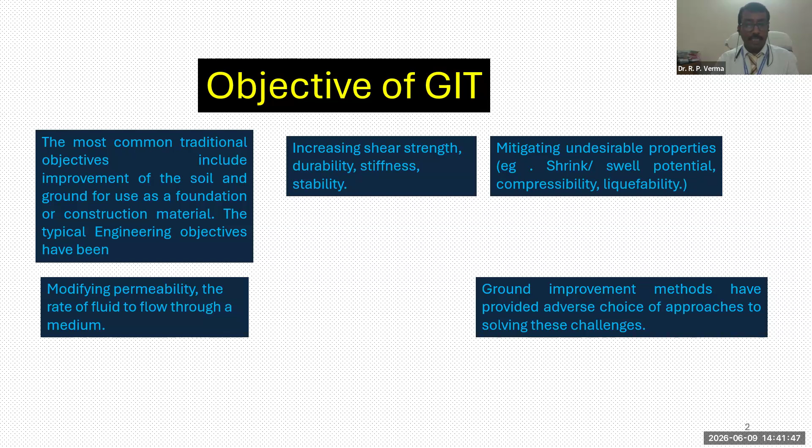This slide explains the major objective of ground improvement techniques. The main purpose of ground improvement technique is to improve weak soil so that it can safely support foundation and construction activity. The objectives include increasing shear strength, stiffness, durability, and stability of soil. It also helps in reducing undesirable properties such as shrinkage, swelling, compressibility, and liquefaction. Another important objective is controlling permeability and fluid flow through the soil. Therefore, ground improvement methods provide effective engineering solutions for problematic soil conditions.

Ground improvement technique is broadly classified into four major categories. These include mechanical modification, hydraulic modification, physical and chemical modification, and modification by inclusion of confinement. Each group offers specific chemical or mechanical interventions to solve distinct subsoil challenges.

When we integrate waste material into this technique, our objective expands into environmental sustainability. We provide alternative disposal solutions for plastic waste, achieve economical soil stabilization by determining optimum plastic fiber content, and minimize the industrial carbon footprint. Mechanically, this includes successfully increasing the shear and tensile strength of the soil matrix while decreasing its overall compressibility.

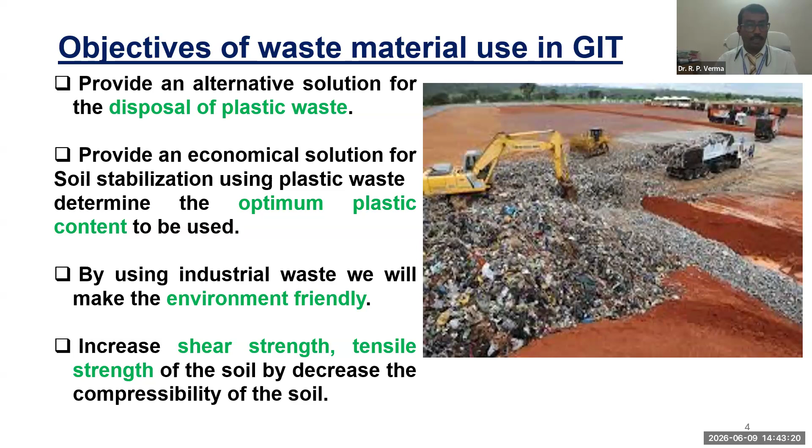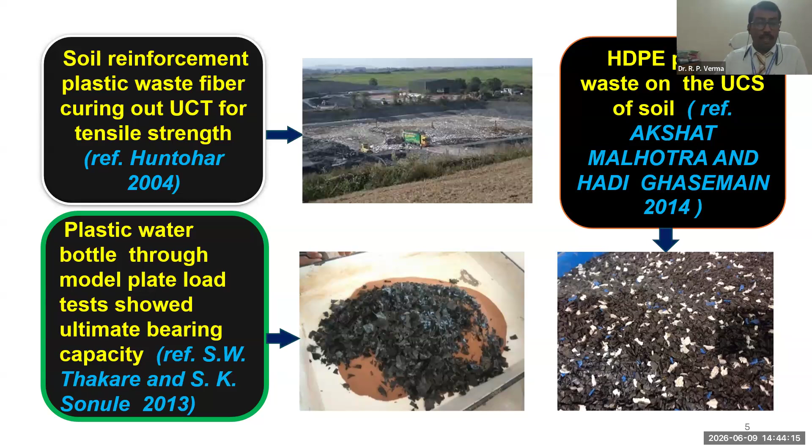Several landmark studies support this approach. Huntohar in 2004 demonstrated enhanced tensile strength by curing plastic waste fiber in an unconfined compression test. Thakare and Sonule in 2013 used plastic waste bottle pieces in a model plate load test. A 2014 study detailed the definitive positive impact of HDPE plastic waste on the unconfined compression strength of soil.

To evaluate this soil mixture, we rely on established testing methodology, starting with the triaxial test. This test measures shear strength under controlled saturation, confining stress, and vertical axis stress. Depending on the drainage conditions of our project layout, we perform unconsolidated undrained, consolidated undrained, or consolidated drained tests.

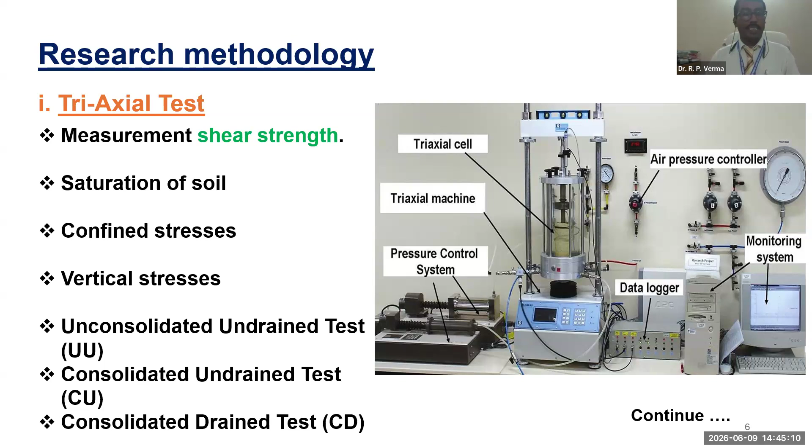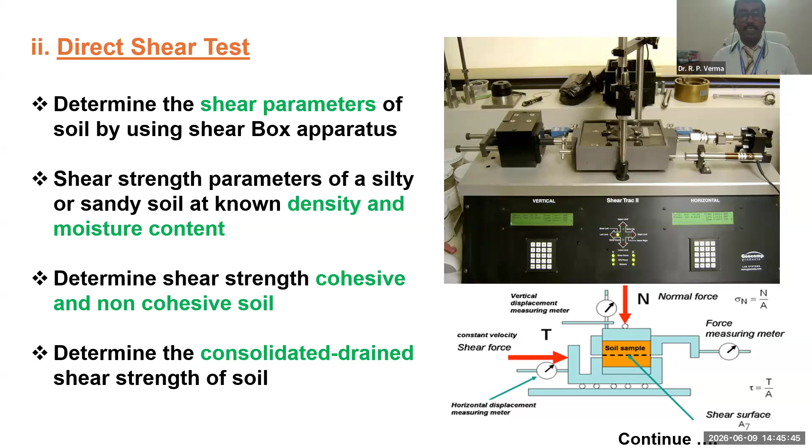Next, the direct shear test utilizes a standard shear box apparatus, allowing us to determine the primary shear parameters. It helps evaluate the cohesion and internal friction angle of both cohesive and non-cohesive soil at predefined densities and moisture content, specifically under consolidated drained conditions.

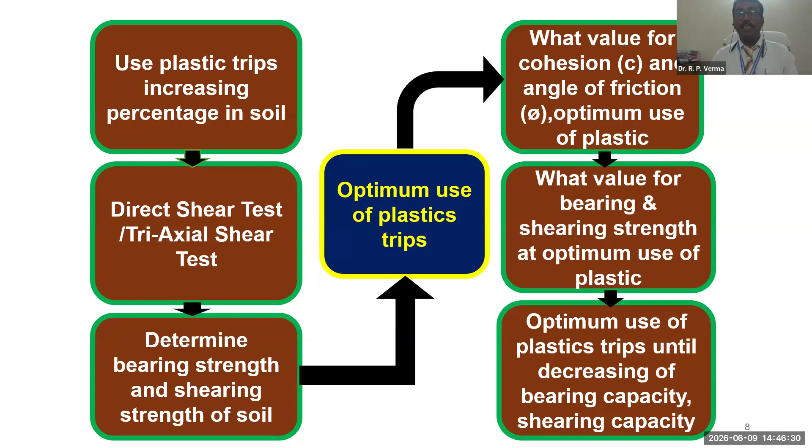This flowchart represents our optimization methodology. We systematically add increasing percentages of plastic strip to the soil, execute direct shear or triaxial tests, and monitor the resulting bearing and shearing strength. We map how cohesion and the friction angle change, continuing this incremental addition until the bearing capacity reaches a peak and begins to decrease.

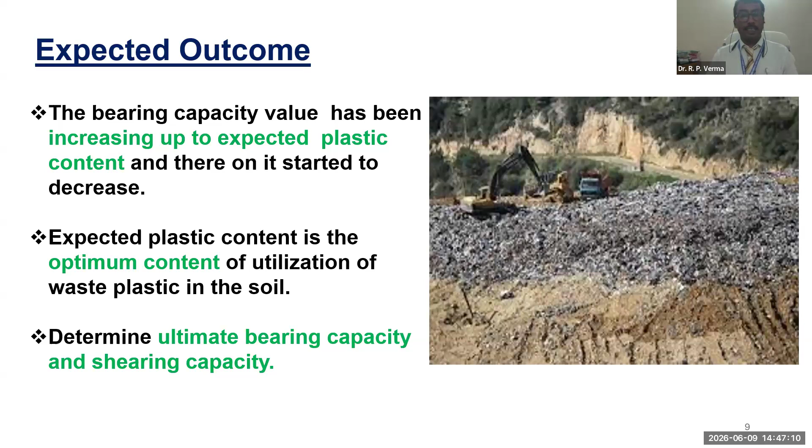Our expected outcome follows a clear curve where the bearing capacity values increase up to a specific threshold before beginning to decline. This peak marks the absolute optimum content of waste plastic for that particular soil type, providing us with the exact design parameter for ultimate bearing and shearing capacity.

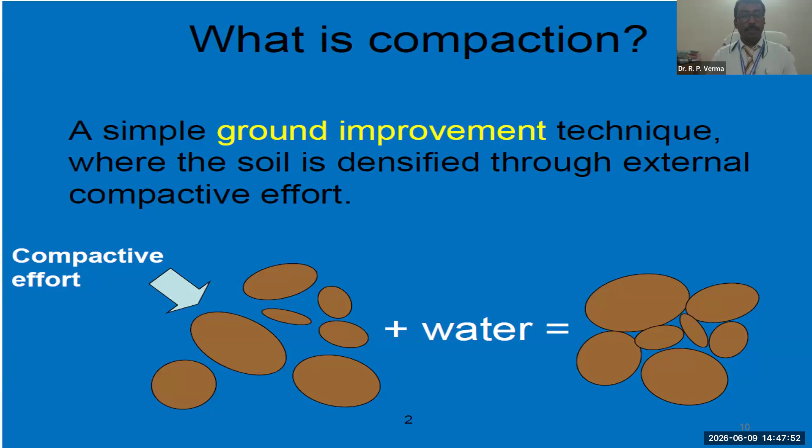Shifting focus to classical mechanical modification, let us define compaction. It is the simplest ground improvement technique, where soil is densified mechanically through an external compactive effort, expelling air voids through the application of energy and controlled moisture. We pack the soil particles close together.

The operational benefits of compaction are extensive. It increases shear strength, reduces compressibility, limits permeability, mitigates liquefaction potential, and controls swelling and shrinkage to prolong durability.

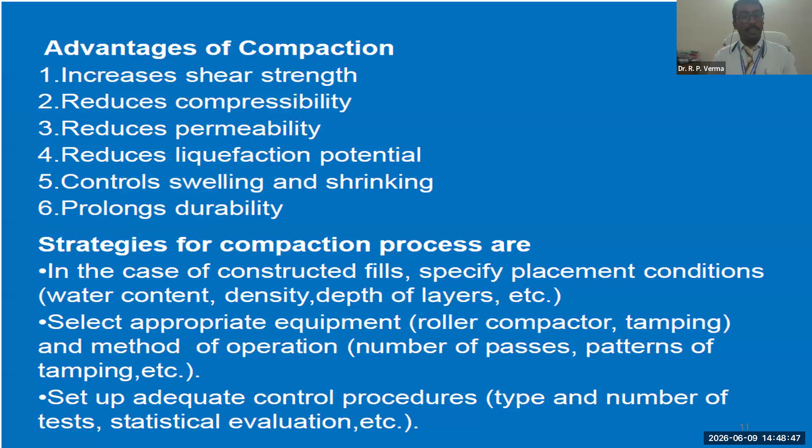To execute this effectively, we must strictly specify placement conditions like water content and layer depth, select proper equipment like rollers and compactors, and implement statistically controlled testing.

In the laboratory, we establish our baseline using a standard compaction test to obtain a proper compaction curve. This defines the optimum water content and maximum dry density.

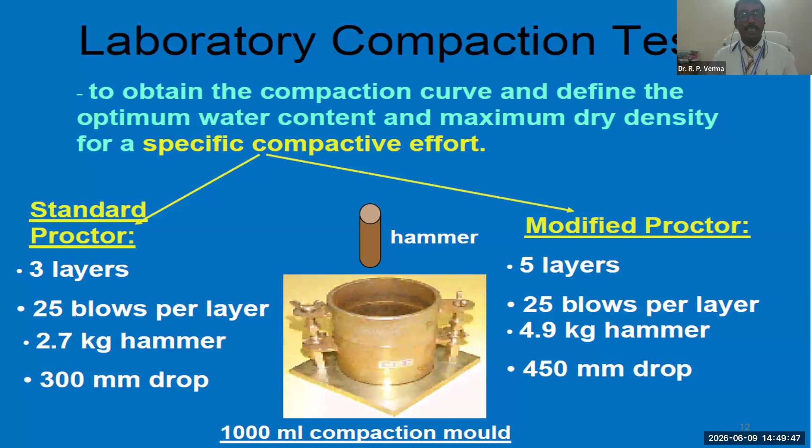We contrast the standard Proctor test, which uses three layers and a 2.7 kg rammer with a 300 mm drop, against the modified Proctor test, which applies a higher compactive effort using 5 layers and a 4.9 kg rammer with a 450 mm drop inside a 1000 cc mold.

When performing shallow surface compaction, field engineers must closely regulate operating frequency, the depth of the soil layer, and the number of roller passes. Special care must also be taken during freezing temperatures.

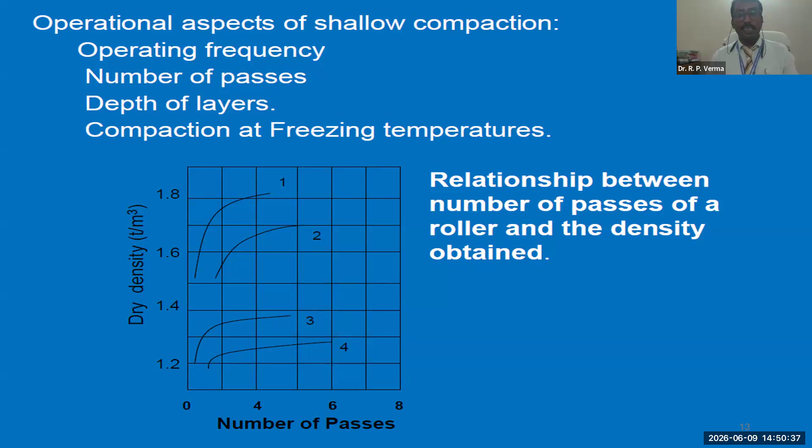As shown in the graph, dry densities increase rapidly over the first few passes of a roller before flattening out, indicating diminishing returns.

The compaction curve illustrates what happens to the three phases of soil: air, water, and solid particles. As water is introduced, it initially acts as a lubricant, allowing particles to reorient into a denser configuration. This ends at the lowest void ratio and highest dry density at the optimum water content, beyond which water begins to displace soil solids.

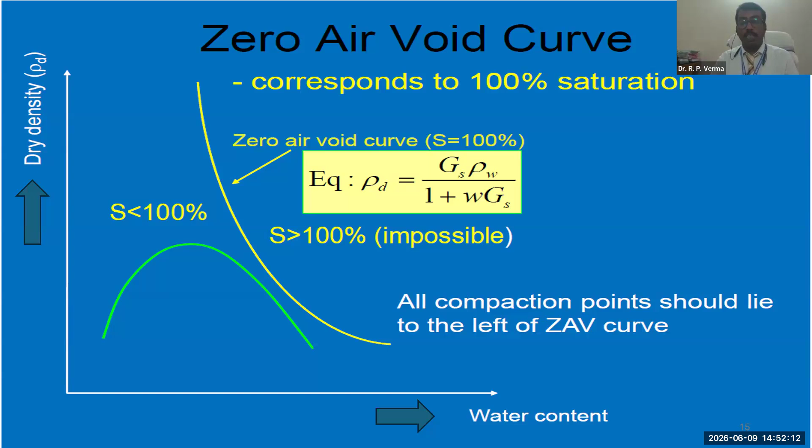The zero air void curve corresponds to a theoretical state of 100% saturation, where all air is entirely expelled, because achieving a saturation level greater than 100% is physically impossible. This curve serves as a mathematical boundary line. In practice, all valid laboratory compaction points must plot strictly to the left of the zero air void curve.

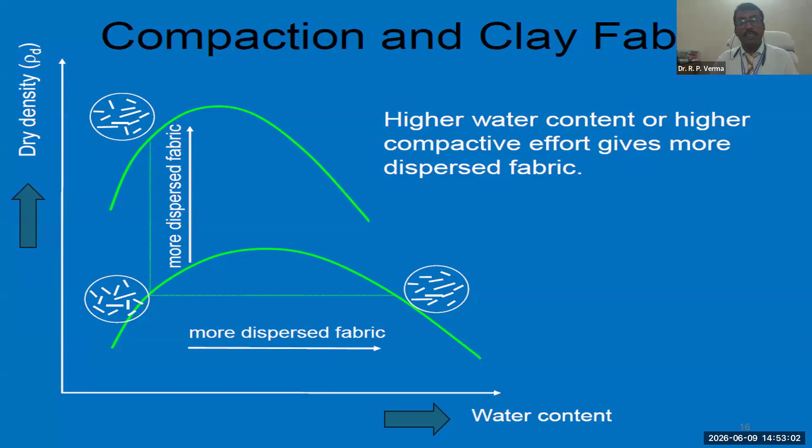Compaction fundamentally alters clay fabric microstructure. Compacting soil on the dry side of optimum results in a random, flocculated fabric. However, applying higher water content or increased compactive effort shifts the orientation into a highly parallel, more dispersed fabric layout, directly altering the soil's engineering behavior.

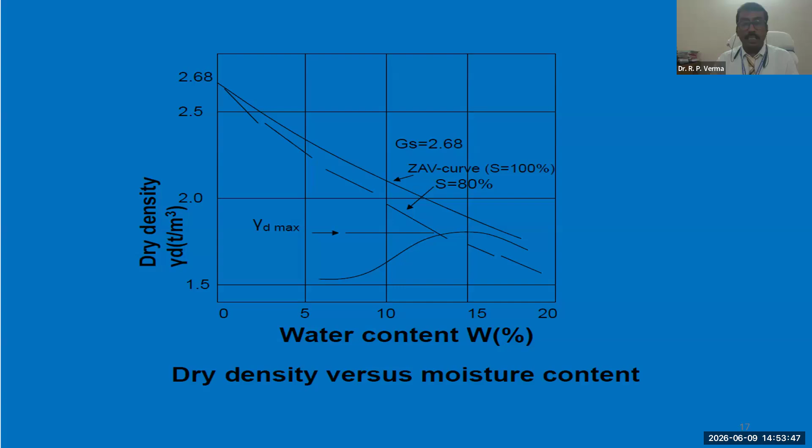This graphic tracks dry density versus moisture content alongside the theoretical saturation line. It clearly shows the curve reaching its vertex at the maximum dry density point. Notice how the curve naturally parallels the 100% saturation zero air void curve and the 80% saturation line as moisture content increases beyond the optimum level.

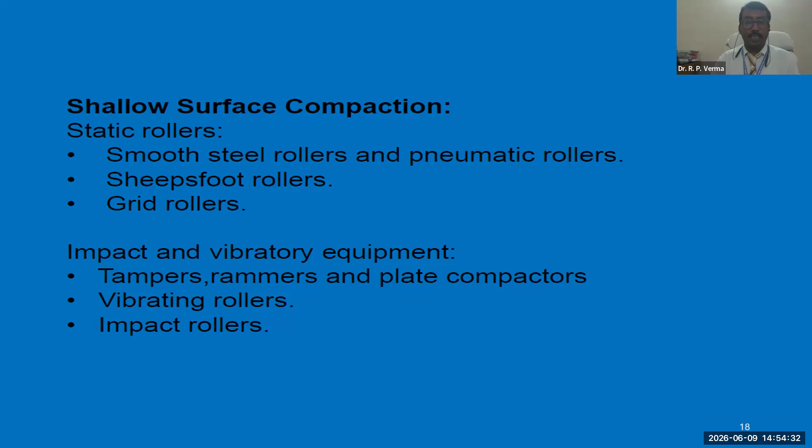For shallow applications, equipment is categorized by its delivering mechanism. Static rollers include smooth steel rollers, pneumatic rubber tire rollers, grid rollers, and sheepsfoot rollers, which are highly effective for cohesive soil. For impact and vibratory action, we utilize tampers, rammers, plate compactors, vibrating rollers, and high energy impact rollers.

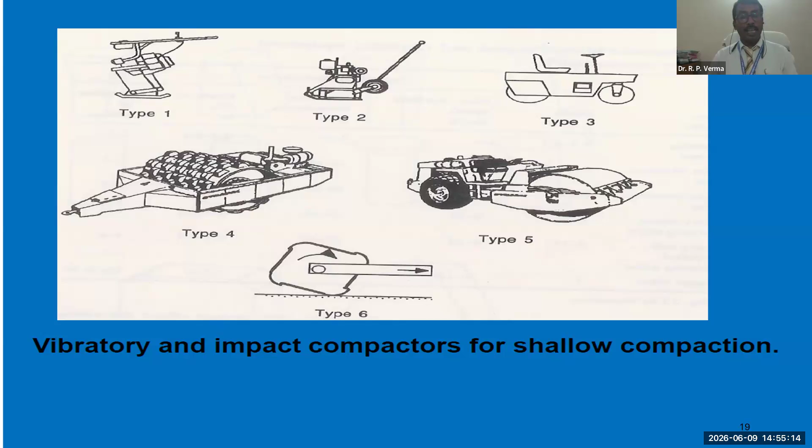This slide illustrates the diverse configurations of soil compactors used in the field, ranging from small hand-guided rammers and walk-behind plate compactors to heavy towed sheepsfoot units, self-propelled smooth drum vibratory rollers, and non-circular impact compactors.

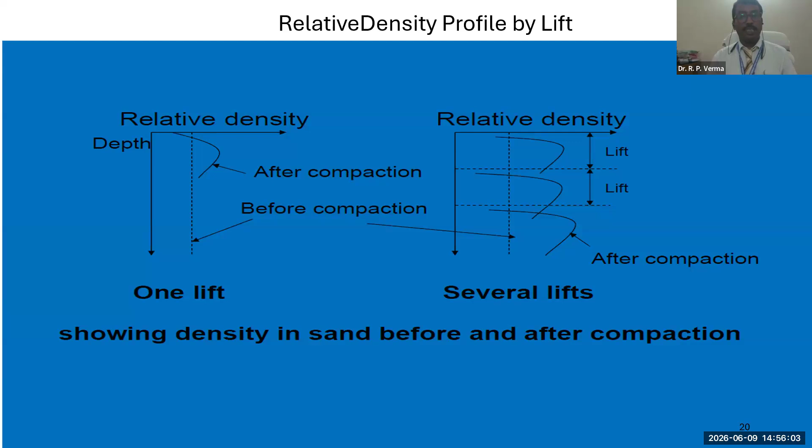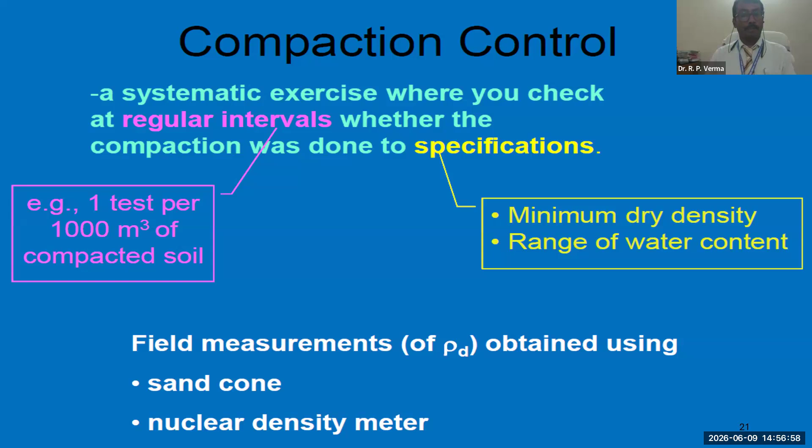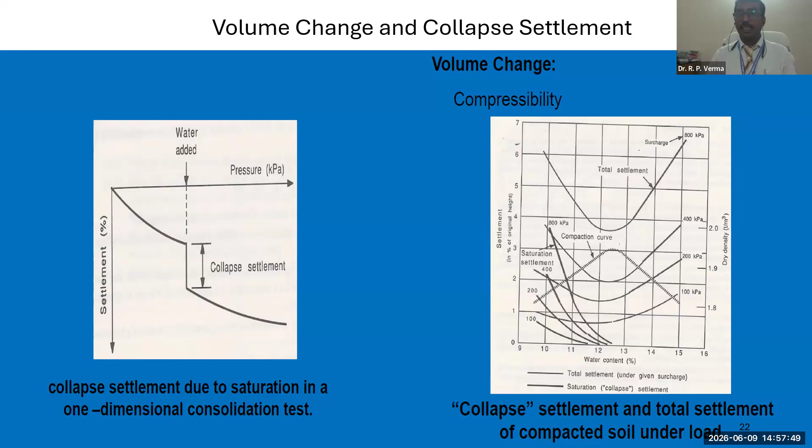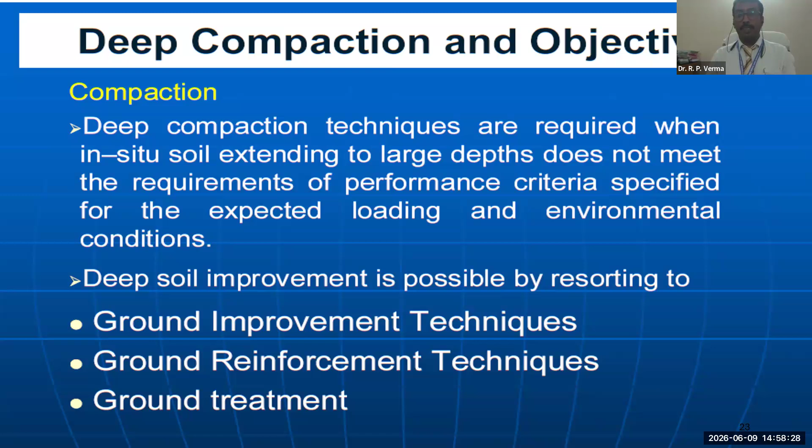When loose in-situ soil extends to large depth, surface compaction is insufficient to meet loading and environmental performance criteria. In this scenario, we must resort to deep soil improvement strategies. These are broadly divided into deep ground improvement techniques, deep ground reinforcement techniques, and specialized deep ground treatment.

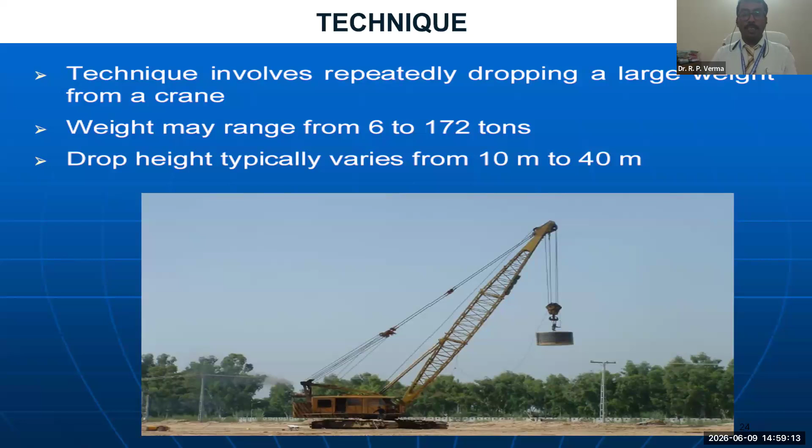One of the most prominent deep improvement methods is dynamic compaction. This technique involves repeatedly dropping a massive heavy weight from a crane directly onto the ground surface. The pounding weights range from 6 to 172 tons, and they are dropped from a typical free fall height varying between 10 meters to 40 meters.

The degree of densification achieved is directly proportional to the total energy input, which is a function of tamper mass and drop height. It is also heavily influenced by the soil saturation level, fine content, and permeability. For instance, a standard 6 to 30 ton weight can successfully densify loose sand to a maximum depth of 3 meters to 12 meters.

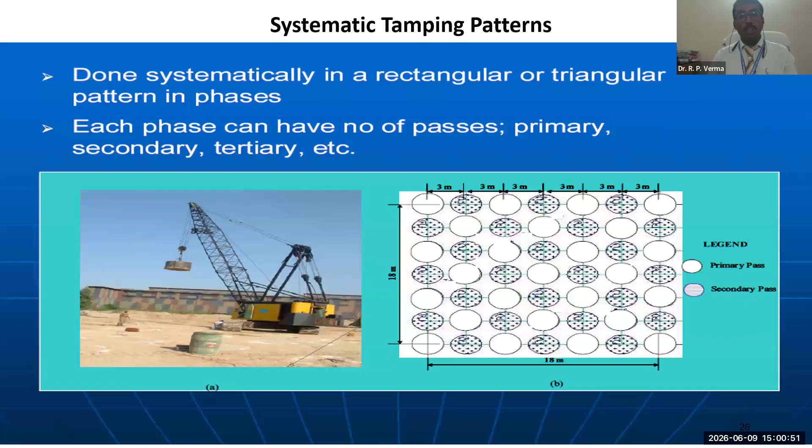Dynamic compaction is never random. It is executed systematically in distinct phases across rectangular or triangular grid patterns. Each overall project phase consists of multiple passes labeled as primary, secondary, and tertiary. This slide shows a typical 18 by 18 meter grid where primary and secondary impact locations are clearly demarcated to ensure uniform coverage.

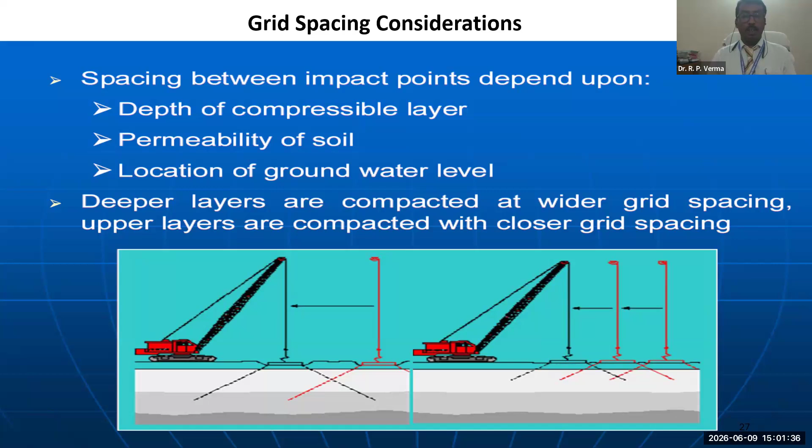The spacing between impact points depends on the depth of the compressible layer, soil permeability, and the location of the groundwater level. As a fundamental rule, deeper soil layers require wider grid spacing with higher energy concentration, whereas the shallow upper layers are compacted later using closer grid spacing and lower drop height.

The repeated heavy impacts create craters across the site. The craters are systematically backfilled with sand and granular material after each tamping pass to maintain a level working platform and introduce high quality material into the ground, because the soil voids collapse vertically. The lateral ground heave around these craters is generally very small.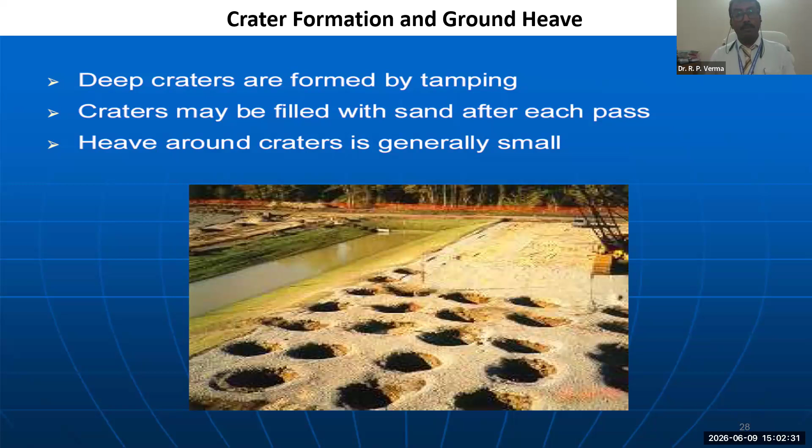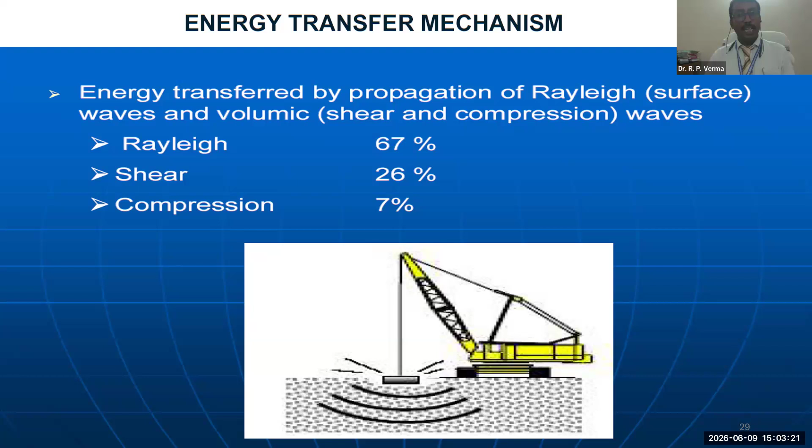The physics of dynamic compaction relies on wave propagation. The impact energy is transferred through the soil by two primary wave families. Roughly 67% of the total energy propagates as Rayleigh surface waves, while the remaining energy travels deeper into the ground as shear waves at 26% and compression waves at 7%.

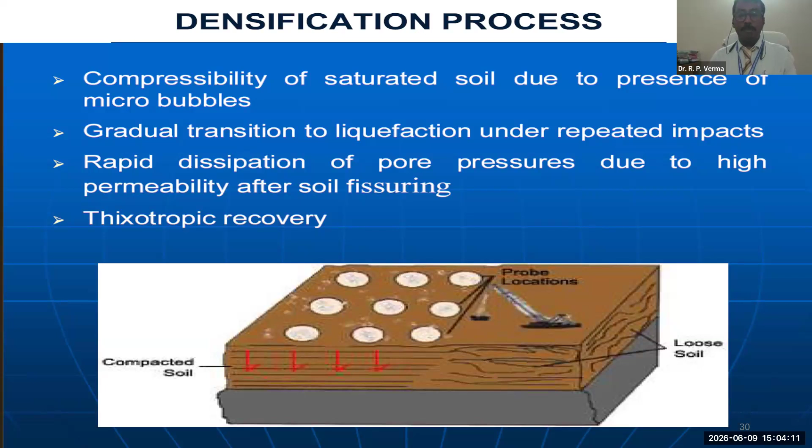In saturated soil, the densification process occurs in stages: initial compaction compresses and entraps micro bubbles, and repeated impact causes a temporary increase in pore water pressure, leading to localized microfissuring of the soil. This dramatic increase in local permeability allows for the rapid dissipation of pore pressure, followed over time by thixotropic strength recovery.

According to the Lukas soil classification for dynamic compaction, soils are divided into three distinct zones based on grain size. Zone 1 consists of pervious clean granular soil with a plasticity index of 0, which yields the best results. Zone 2 represents semi-pervious soil where multiple compaction phases are required to allow pore pressure to dissipate. Zone 3 comprises impervious clay and silt, which are the worst suited and often require alternative techniques.

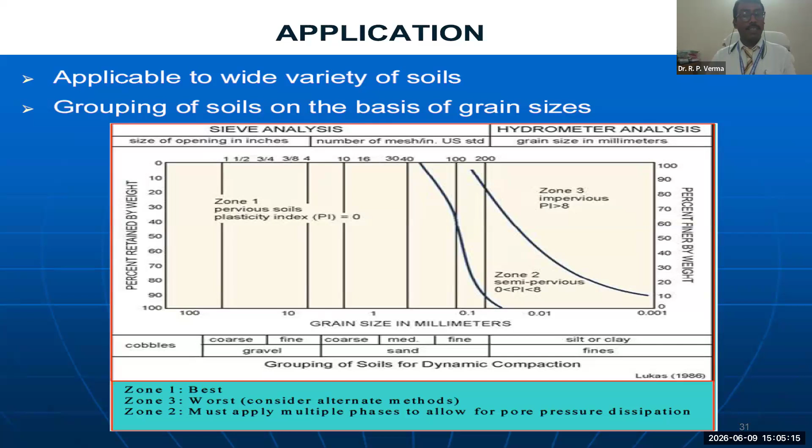Dynamic compaction is primarily used to compact extensive granular fill. It is uniquely effective for compacting rock fill below water level, or for bouldery soils where traditional vibratory methods struggle or fail. Furthermore, it has become a premier method for upgrading variable waste dumps, sanitary landfills, and loose mine waste.

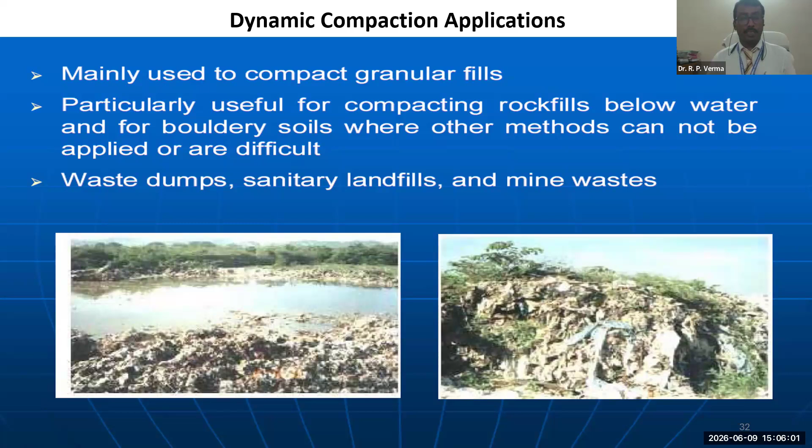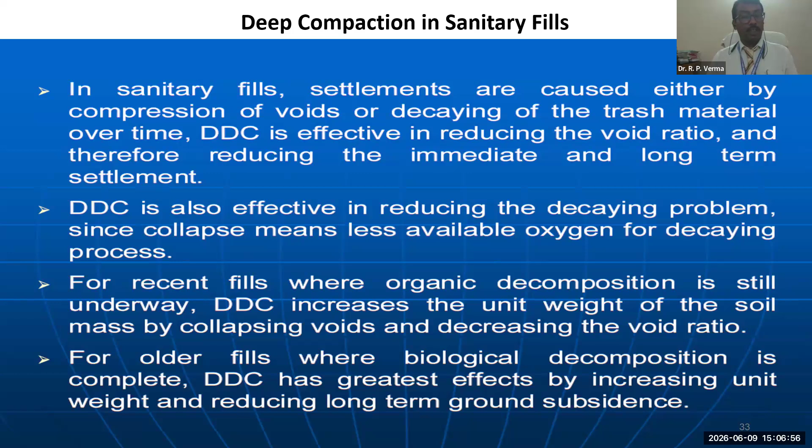In a sanitary landfill, long-term settlement occurs due to void compression and organic decay. Deep dynamic compaction effectively collapses these voids, reducing both immediate and long-term subsidence. In recent fills, it increases unit weight and drives out oxygen, slowing down ongoing decomposition. In older, completely decomposed fills, it maximizes unit weight to create a stable platform.

This systematic visualization summarizes a deep dynamic compaction crane operation. It demonstrates how the energy wave radiates downward and upward from the tamper footprint, creating a dense bulb of improved soil capable of supporting high bearing capacity structures and structural foundations.

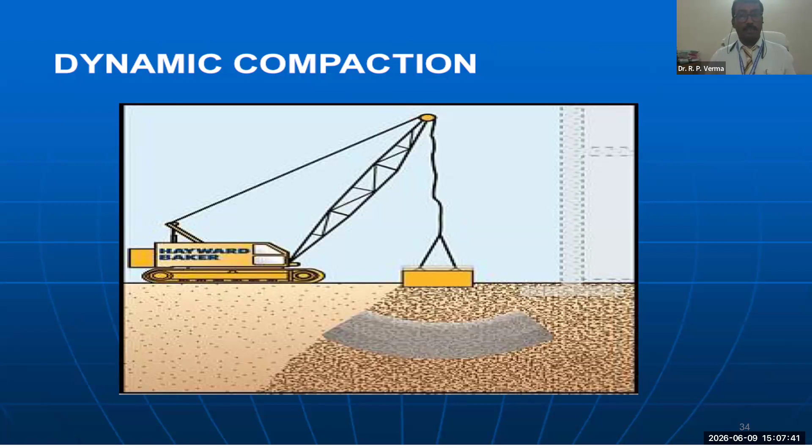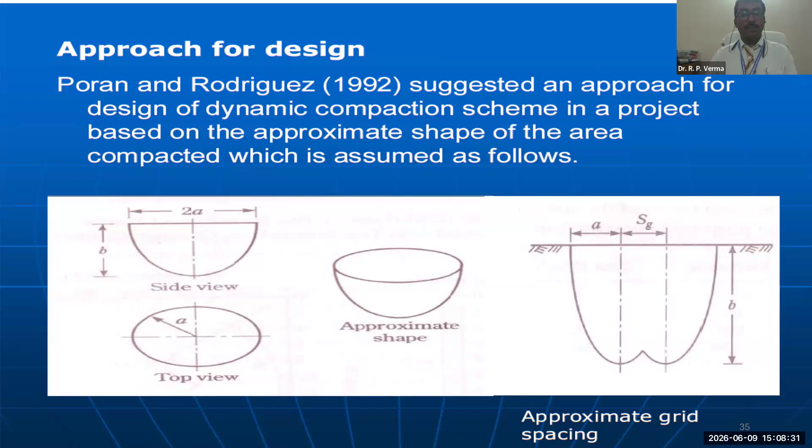For engineering design, Poran and Rodriguez suggest a geometrical approach. They model the individual compaction zone as an approximate bowl shape defined by a radius A and a depth B. By evaluating this geometric dimension against the approximate grid spacing, engineers can calculate the exact coverage and overlap required for uniform densification.

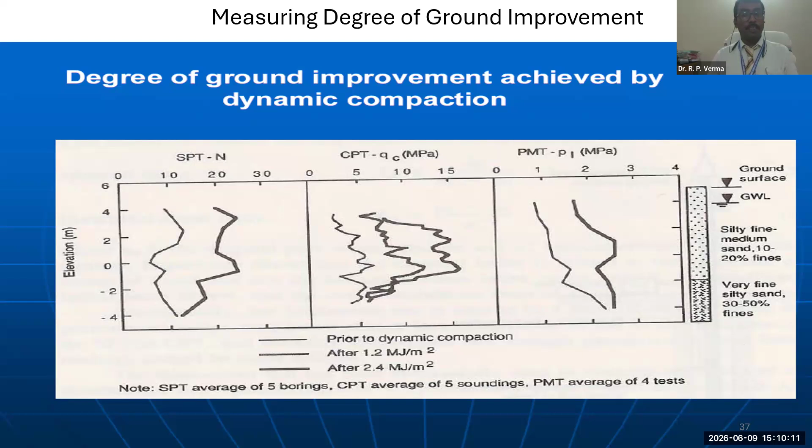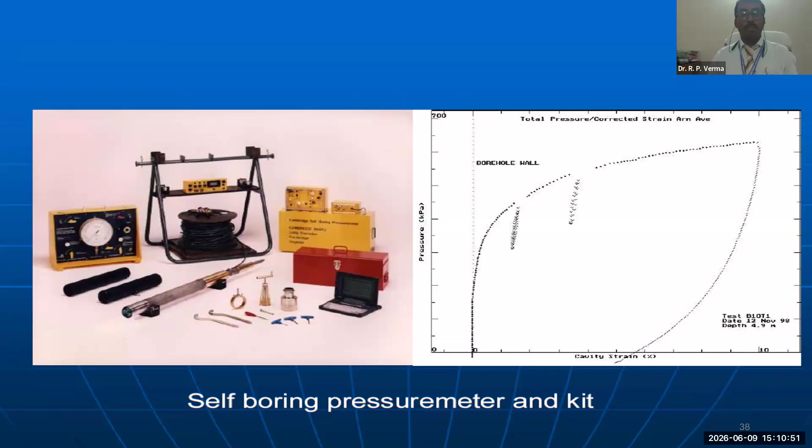Advanced in situ verification often utilizes a self-boring pressure meter. This instrument extends a cylindrical membrane inside the borehole without disturbing the surrounding soil wall. The resulting pressure versus cavity strain curve gives us direct, high accuracy field measurement of the soil shear modulus and horizontal stress state.

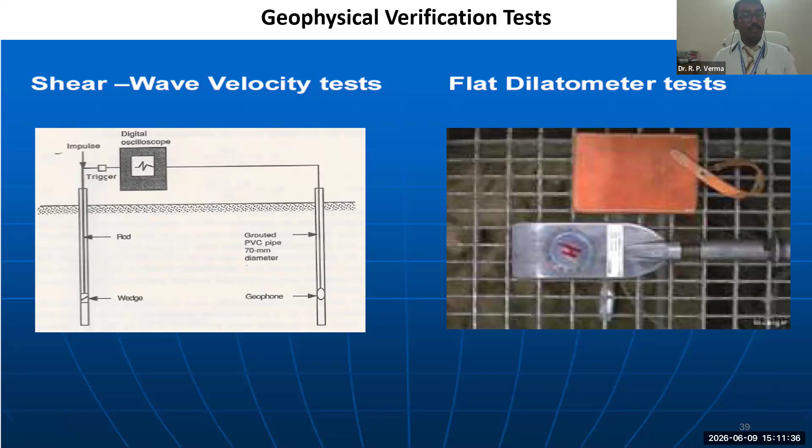We also rely heavily on non-destructive geophysical testing, including shear wave velocity tests and flat dilatometer tests, using an impulse source at the surface and recording wave arrival via downhole geophone. We can precisely map how the mechanical stiffness of the soil changes across different depths.

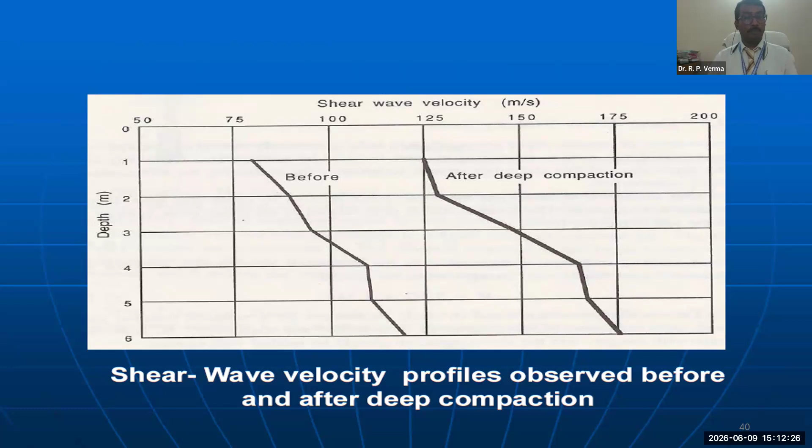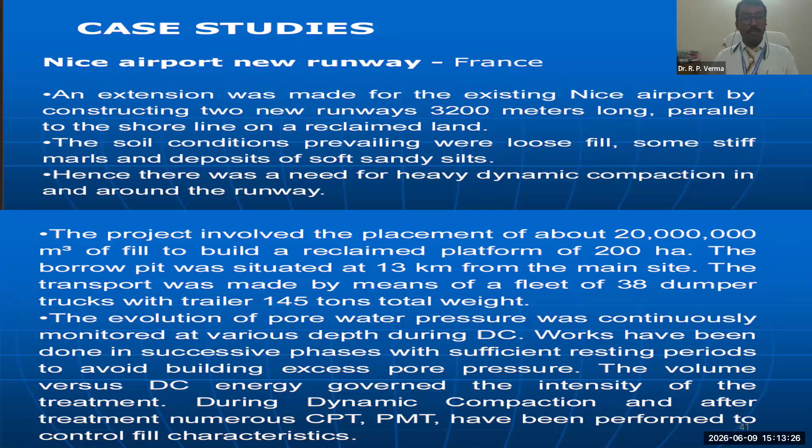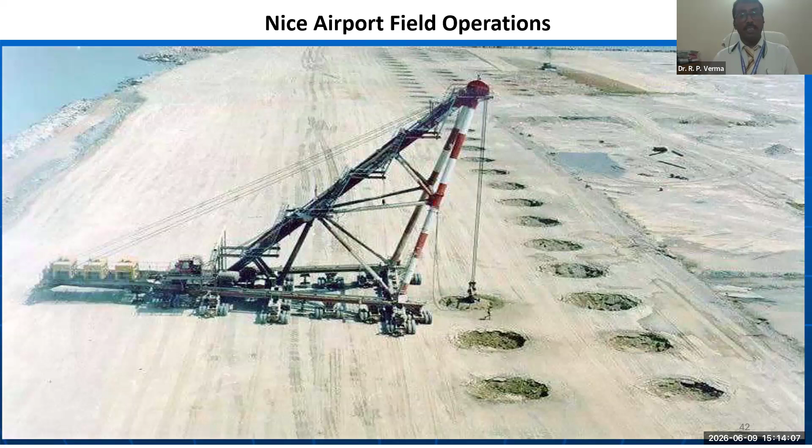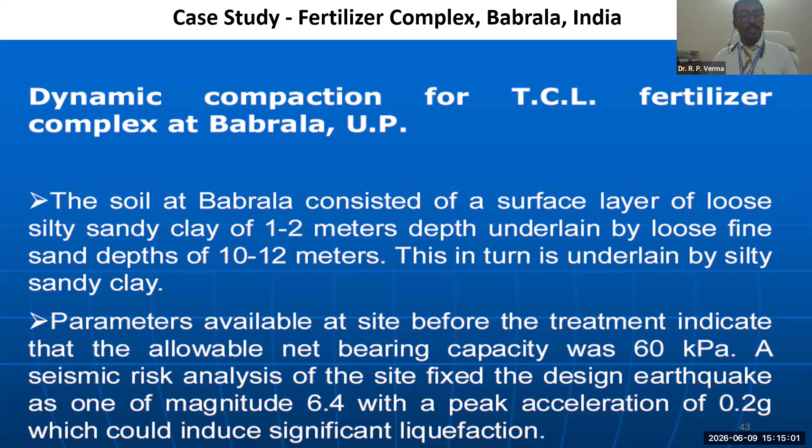Our final case study focuses on the TCL fertilizer complex in Babrala, Uttar Pradesh. The site profile consisted of highly liquefiable loose fine sand extending down 10 to 12 meters, with a very low initial allowable net bearing capacity of just 60 kilopascals. A seismic risk assessment indicates that a magnitude 6.4 earthquake with a peak acceleration of 0.2 g would induce severe liquefaction across the site.

As educators, we also emphasize the importance of pilot testing and proper planning to our students. The engineering team at Babrala did exactly that.

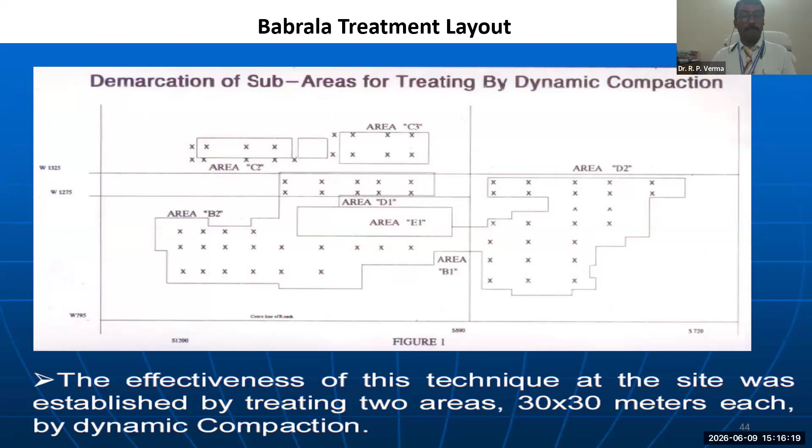How did they measure success? They used standard field verification methods: standard penetration testing and cone penetration testing. Let us look at the figure which maps the SPT N value against depth for the test patch B.

The curve with a square mark shows the baseline condition before compaction, where N values barely scratch past 5 blows per 30 centimeters in the upper zone. Following dynamic compaction, denoted by the triangular mark, you can see an immediate spike in soil resistance. Crucially, for our research discussion on pore water pressure, let's look at the star mark curve taken 1 month later. It clearly demonstrates the phenomenon of soil strength gain over time due to thixotropy and delayed consolidation, as excess pore pressure fully equalized.

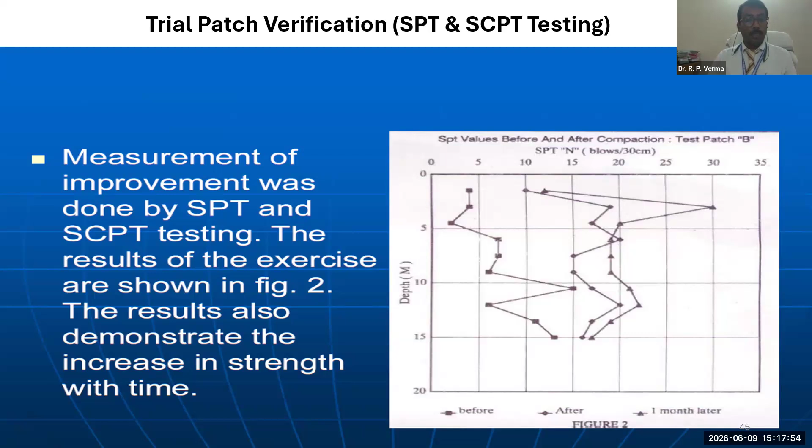Based on those trial outcomes, the engineer's specifications were fine-tuned to hit two rigid milestones: first, achieving a safe allowable bearing pressure of 200 kilopascals at a depth of 2 meters, and second, ensuring a zero liquefaction state during the design earthquake. To achieve this, a heavy duty 4-pass dynamic treatment program was enacted.

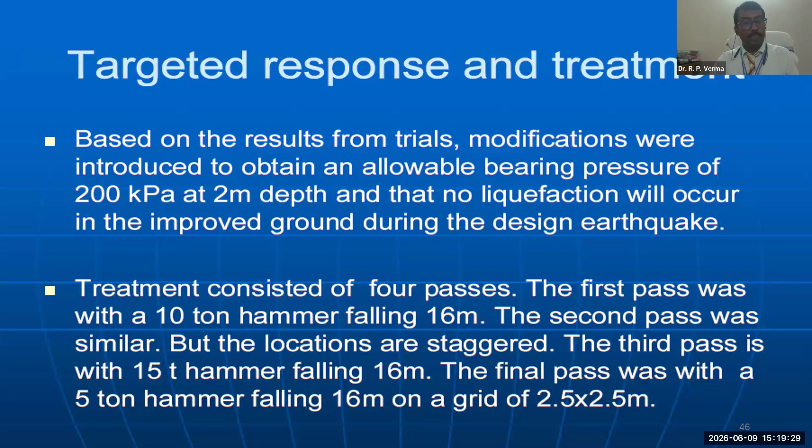Phase 1 and 2 utilized a 10-ton hammer drop from a massive height of 16 meters, with the second pass arranged in a staggered grid to fill the gaps of the first. Pass 3 intensified the energy, deploying a 15-ton hammer from 16 meters to target the deepest portion of the loose sand. Finally, pass 4 acted as an ironing pass to densify the remaining superficial soil using a 5-ton hammer from 16 meters on a tight 2.5 by 2.5 meter grid.

The entire site was divided into the sub-areas we saw earlier. If we look at the specific plot for the areas, to verify that the treatment was uniform across the entire facility, monitoring was extended across all blocks. Figure 4 details area B and figure 5 covers area C. Notice how both charts reflect the exact same pattern: a dramatic shift of the SPT curve to the right, even at depths of 5 to 10 meters, where loose sand previously threatened structural collapse under seismic load.

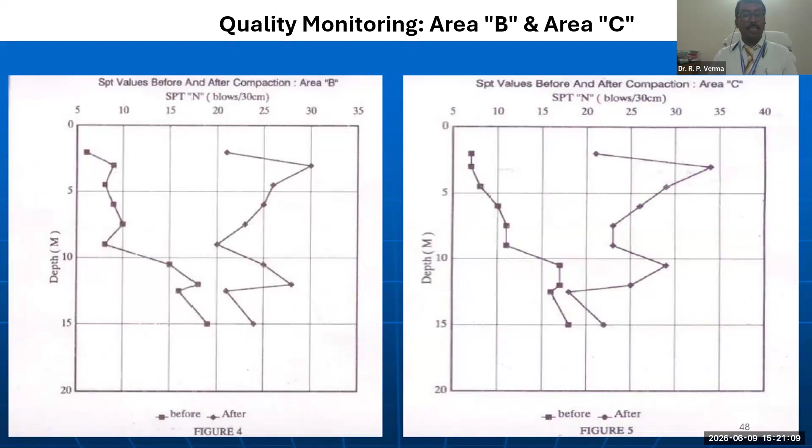To conclude this first case study, the dynamic compaction program achieved an overwhelming success. It successfully densified the loose granular sand layer all the way down to a depth of 12.5 meters. Looking at the engineering metrics, the soil load bearing capacity experienced more than a threefold increase, skyrocketing from the initial 60 kilopascals to a robust 200 kilopascals. Most importantly, the entire industrial site was effectively earthquake-proofed against its design seismic risk, validating dynamic compaction as an economical alternative to deep piling in granular deposits.

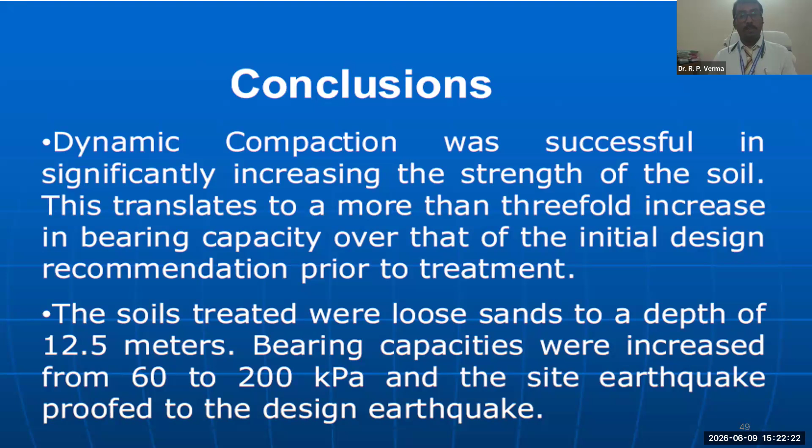Next, let us pivot from loose granular sand to a different soil challenge: soft clay and silty matrix. As we now know, pure vibration or impact compaction fails in cohesive soil because water cannot escape quickly. Instead, we use a stone column, developed globally through methodologies like the Japanese vibro-compozer system or the European vibro-floatation technique.

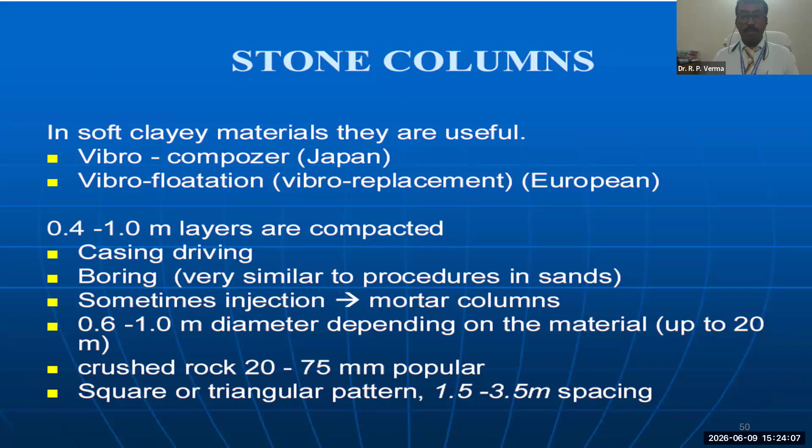These columns are constructed by compacting stone aggregate in 0.4 to 1 meter deep layers. This can involve casing, driving, or specialized boring. In unique scenarios, mortar injection is used to form rigid columns. Typically, these columns range from 0.6 to 1 meter in diameter, can extend up to 20 meters deep, and use crushed rock sized between 20 to 75 mm, arranged in a square or triangular pattern spaced at 1.5 to 3.5 meters.

Why are stone columns so effective in soft clay? They perform a dual function: reinforcement and drainage. Structurally, because the stone column possesses a much higher stiffness and shear modulus than the surrounding weak clay, a large percentage of the surface load is directly transferred to the stone column. They mimic a rigid pile foundation but drastically reduce cost because they do not require a structural pile cap or rigid connection.

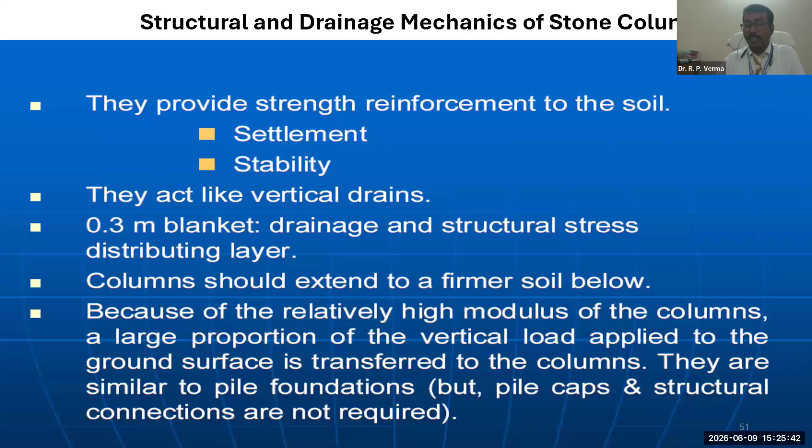Hydraulically, they act as vertical sand gravel drains by reducing the drainage path distance. They accelerate pore water dissipation, completing long-term settlement in weeks instead of years. A 0.2 to 0.3 meter granular sand blanket is laid at the surface to serve as both a drainage path and a stress distribution layer.

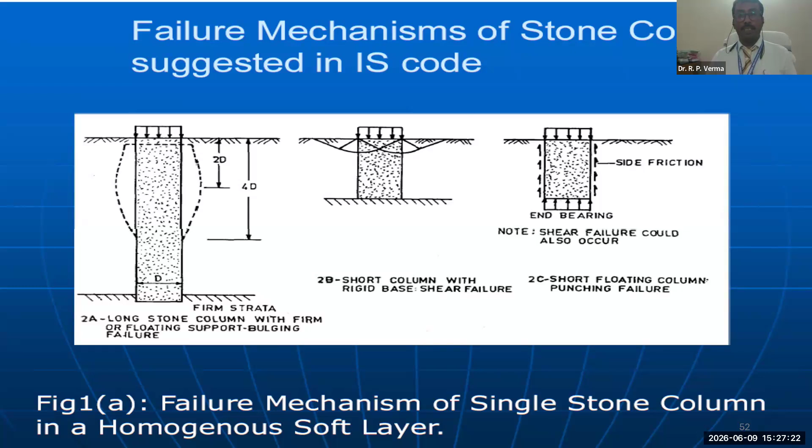Within those specific weak boundaries, this underscores why detailed site investigation is mandatory before estimating column confinement.

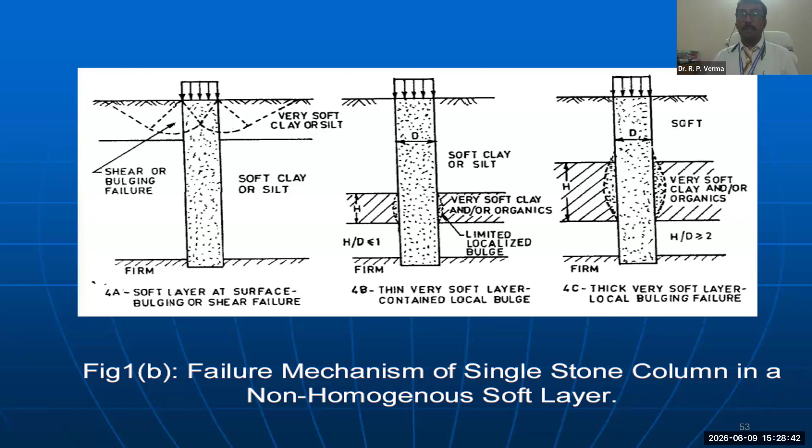To translate this complex analytical formula into practice, we train our engineers on specialized numerical tools like Stone Column software. The design workflow consists of 5 clear steps.

Step 1: enter the stone column grid layout, such as a rectangular grid with 1.5 meter spacing, and the foundation geometry. Step 2: capture the column material properties, such as the friction angle, typically set around 40 degrees, and the dry unit weight.

Step 3 involves inputting the stratified soil layers, including depth boundaries, constrained modulus, cohesion, and Poisson's ratio. Step 4: load the comprehensive project data. Step 5: generate the structural output and settlement reduction curve, often computed using a Priebe analytical diagram.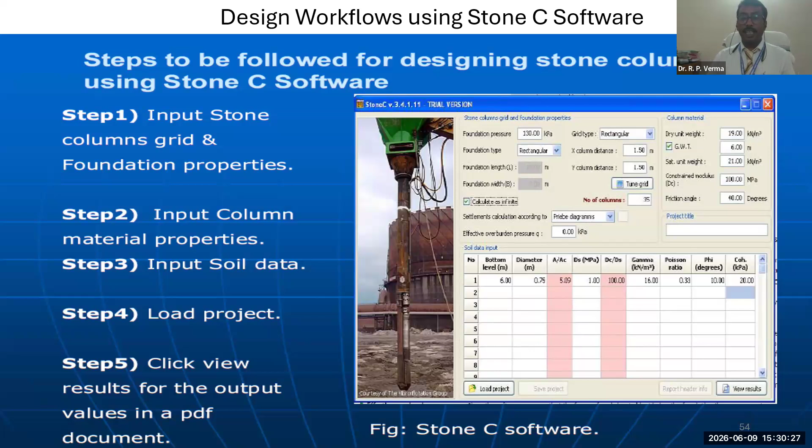Let us now compare traditional stone columns with a highly efficient variation: the rammed aggregate pier. This step-by-step field construction is very elegant.

First, a cavity is drilled using a mechanical auger, and temporary casing is installed if cave-ins are a risk. Second, a high-quality crushed stone layer is placed at the bottom of the open cavity. Third, a patented beveled tamper rams this bottom stone layer forcefully, driving the aggregate laterally into the surrounding matrix to produce an enlarged, high capacity bulb.

Fourth, successive aggregate layers are densified in thin lifts of 30 centimeters using the high energy tamper. Finally, the top of the compacted pier is preloaded, ensuring an incredibly stiff column.

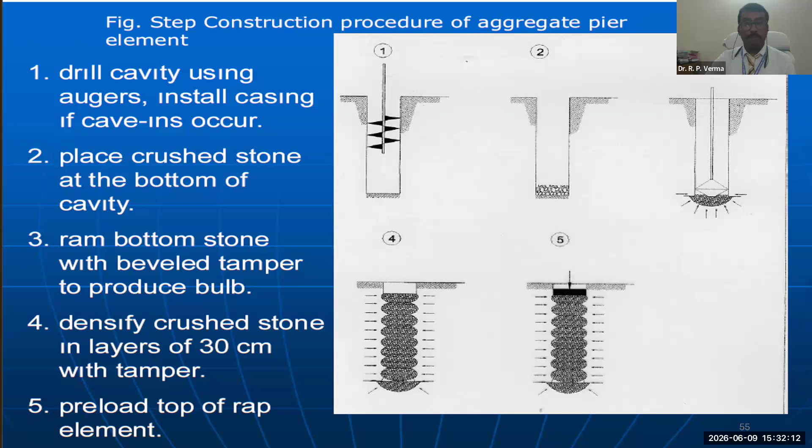This matrix outlines the critical engineering trade-off between stone columns and aggregate piers. Traditional stone columns are built for depth, spanning 5 to 15 meters, with a typical wide spacing of 4 times the diameter (4D), and thick lifts of 1.5 to 3 meters. This yields an allowable foundation pressure of 25 to 150 kilopascals.

Conversely, aggregate piers are shorter, high intensity inclusions, spanning 2 to 8 meters with a tight spacing of 2D, because they are compacted in ultra-thin lifts of 20 to 30 centimeters using a backhoe with a specialized tamper.

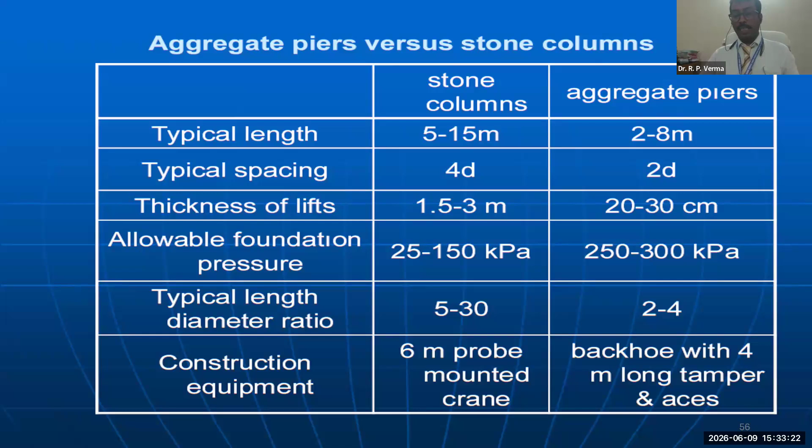Let us dive deeper into the overarching family of deep vibratory methods, beginning with vibro compaction. This technique uses depth-directed horizontal vibration to compact loose soil formations across massive depths. The radial zone of compaction achieved around a single probe is directly determined by the mechanical characteristics of the vibrator, or float.

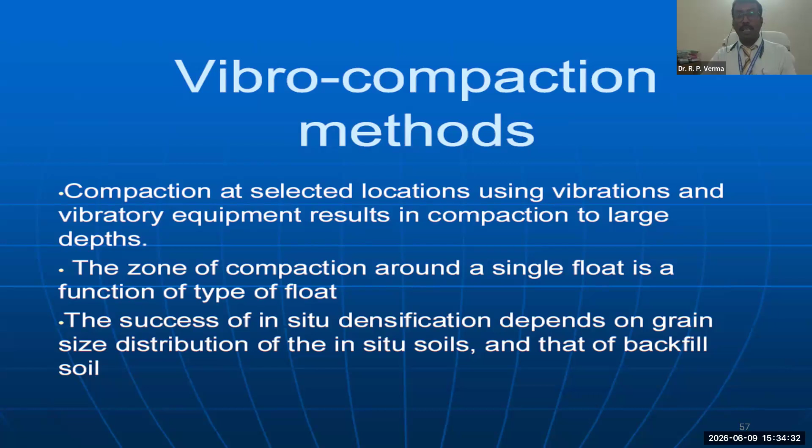Let us break down exactly what this zoning means for the engineering design. As classified by standard geotechnical practices, soil falling within Zone A and Zone B consists of clean gravel and coarse sand. These soils can be easily compacted using deep vibratory vibro compaction, also known as vibroflotation, because they rearrange radially under horizontal shear waves. However, soil in Zone C and Zone D cannot be densified by vibration alone.

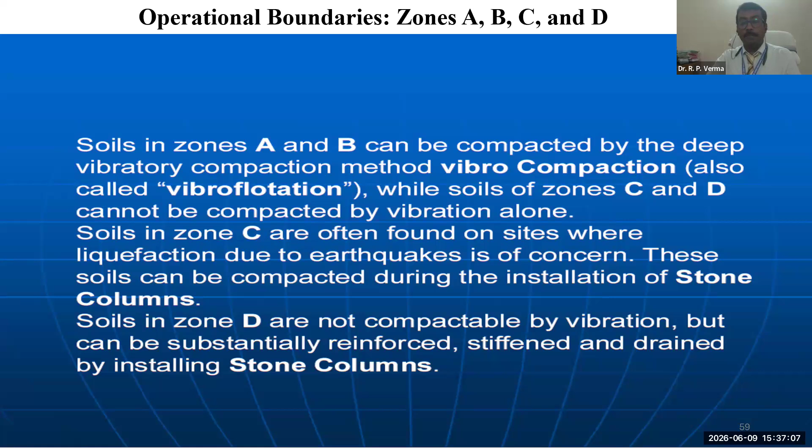Zone C soil represents fine silty sand that is highly susceptible to earthquake liquefaction. This requires the physical installation of a stone column to achieve stability. Zone D soil contains high clay fraction. It is completely uncompactable by vibration but can be reinforced, stiffened, and rapidly drained by inserting a stone column.

Technologically, true vibroflotation relies on a specialized depth probe that generates pure horizontal motion from an internal eccentric vibrator. Trying to use a standard top pile-driving vibrator operating in vertical mode is highly insufficient for shifting lateral soil grains. Modern techniques can even match the operating frequency of the probe to the natural resonant frequency of the soil skeleton, as seen in the Muller resonance compaction technique.

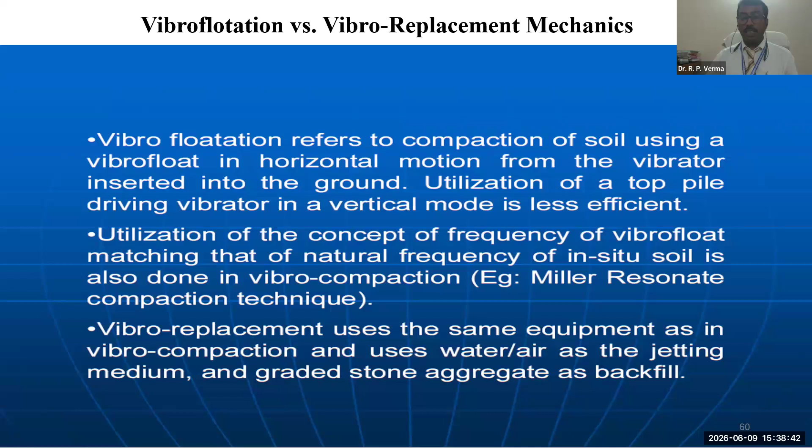On the other side, vibro replacement uses identical mechanical rigs but introduces high pressure water or air as a jetting medium to flush out weak material, backfilling the void with graded stone aggregate.

To reiterate, the primary objective of vibro compaction is the deep densification of clean, coarse gravel soil containing less than 10% to 15% silt. The physics are straightforward: cohesionless soil particles possess no intermolecular bond. When subjected to intense depth vibrations, their temporary interlocking structure collapses, as shown in the before and after graphics. The loose particles rearrange into an optimal close-packed configuration, which significantly reduces the soil's void ratio.

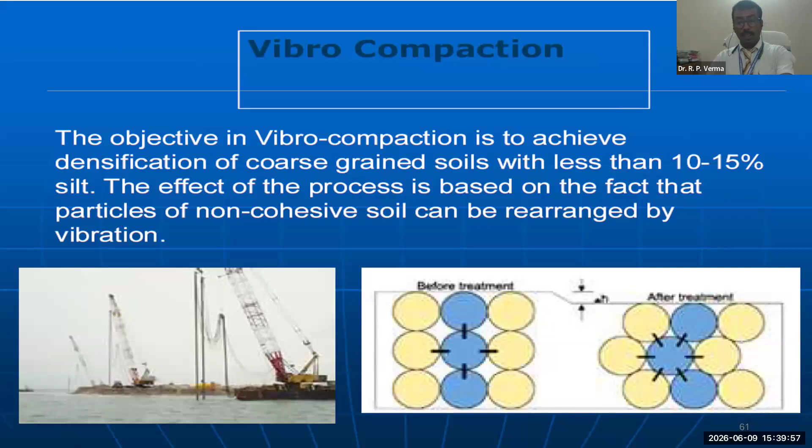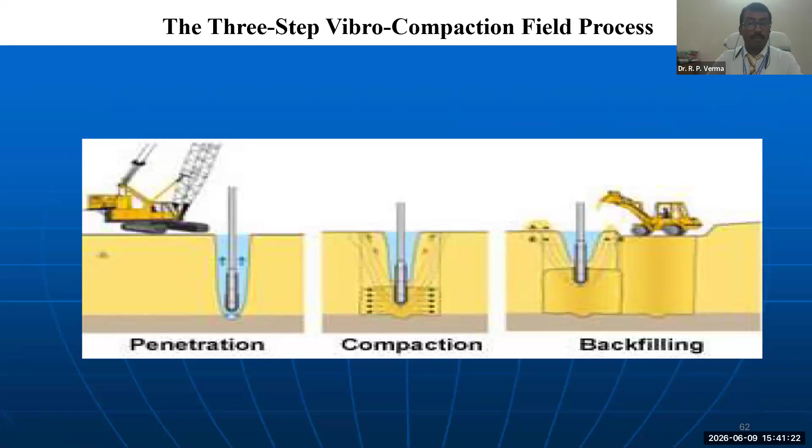To summarize its parameters, vibro compaction applies strictly to coarse soil with low fines. Its primary benefits include increased shear strength, enhanced elastic stiffness, and a total reduction in liquefaction potential.

It is heavily used in both onshore and offshore environments for heavy structures like chemical plants, storage tanks, airport runways, port walls, and embankments. Remarkably, modern heavy vibrators can achieve a maximum treatment depth of up to 60 meters.

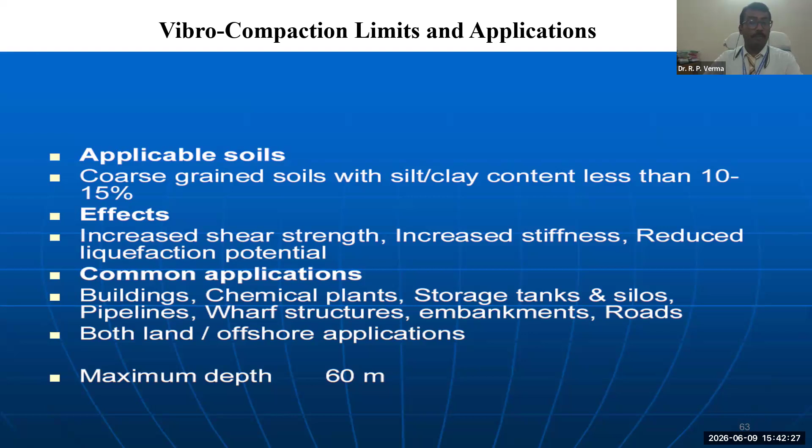When dealing with soft silt, plastic clay, or irregular fill, we switch to vibro replacement because fine grain soils have high cohesion and low permeability. Their particles cannot rearrange under pure vibration.

Therefore, instead of trying to compact the native soil, the probe displaces it to install a matrix of dense stone columns, physically reinforcing the soft ground.

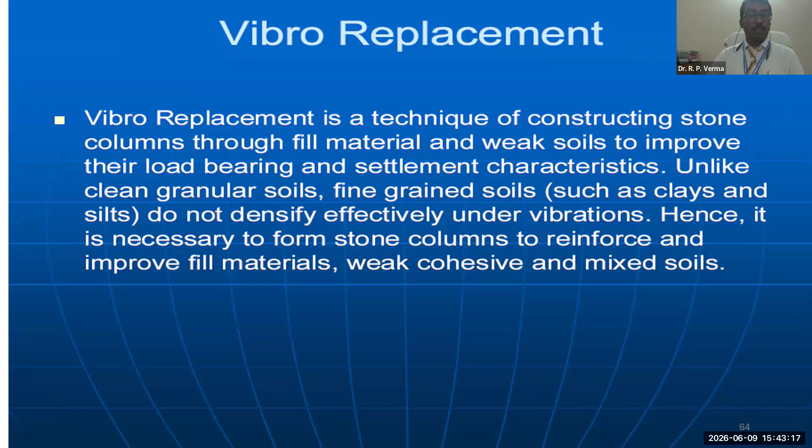The underlying principle relies on creating a composite foundation support system. The resulting ground consists of stiff stone pillars bounded by intervening native soil, creating a low compressibility matrix with high load capacity.

Furthermore, because these stone columns serve as high permeability escape routes, the excess water pressure generated by structural loading dissipates rapidly. This means that necessary consolidation settlement occurs at a dramatically accelerated rate during the construction phase itself, preventing post-construction damage.

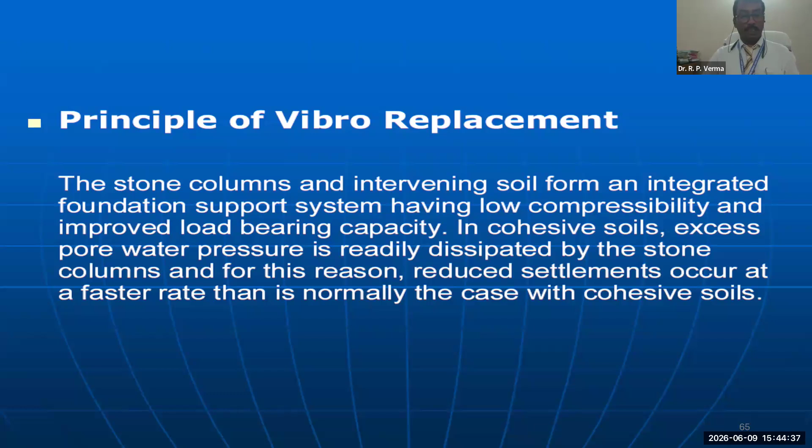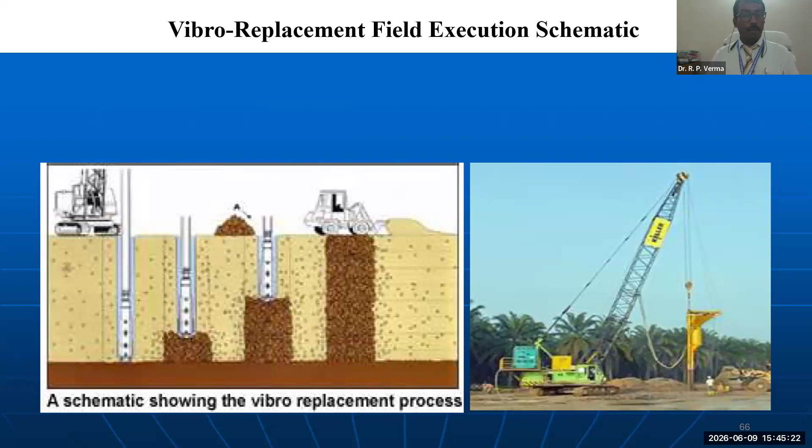To wrap up the technical look at vibro replacement, its core mechanism relies on structural reinforcement and accelerated drainage. It is highly effective across challenging profiles: mixed deposits of clay and sand, soft silt, ultra soft marine clay, and even loose garbage landfill. It provides excellent mitigation against liquefaction and lateral spreading.

Common applications include airports, runways, bridge abutments, railway embankments, and deep offshore structures. Its typical maximum operational depth ranges between 20 to 40 meters.

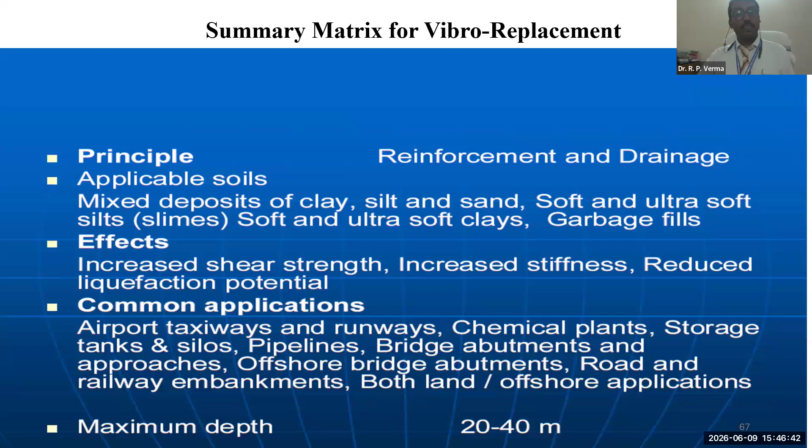I hope this detailed breakdown of dynamic compaction, stone columns, and vibro methodology provides valuable material for our classroom and research projects. Thank you to everyone. Have a nice day.